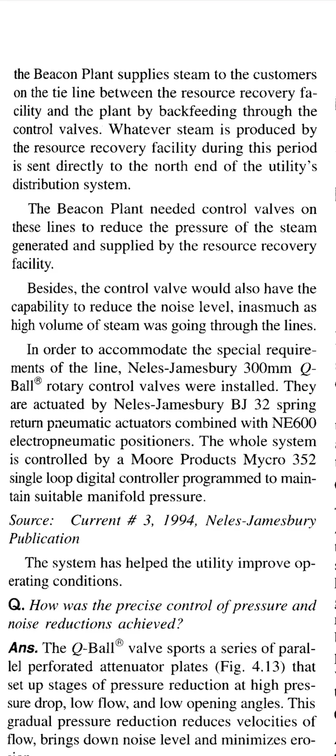The system has helped the utility improve operating conditions.

Question: how was the precise control of pressure and noise reduction achieved? Answer: the Q-ball valve sports a series parallel perforated attenuator plates that set up stages of pressure reduction at high pressure drop, low flow, and low opening angles.

This gradual pressure reduction reduces velocity of flow, brings down noise level, and minimizes erosion. Note: when high flow rate, large opening angle, and minimal pressure reduction are required, the plates align themselves with the flow, providing higher capacity than a traditional globe valve.

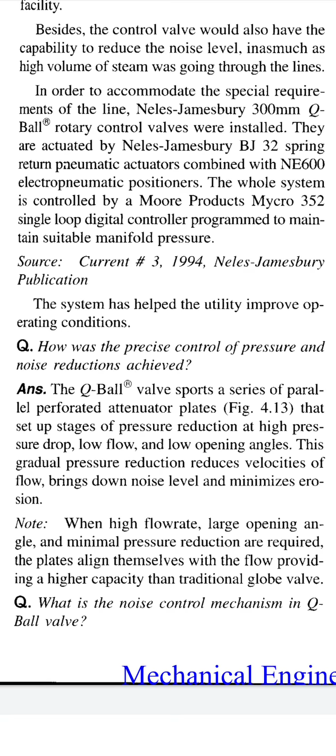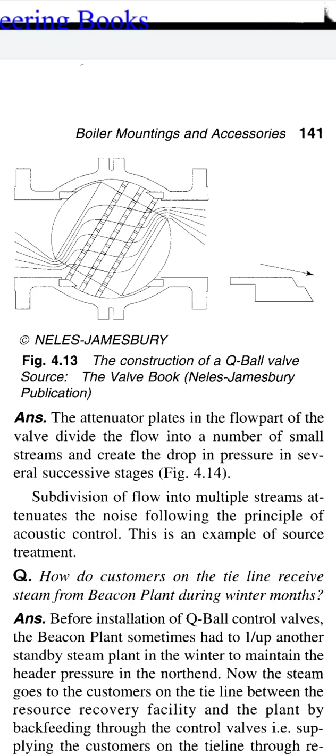We can see in the pictures the construction of a Q-ball valve. Source: the Valve Book, Neles Jamesbury publication.

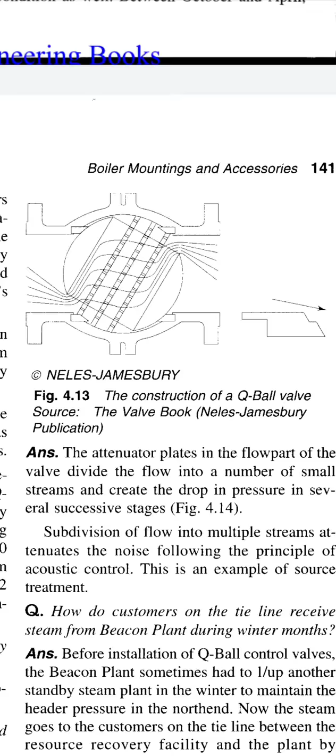So this Q-ball valve is reducing the noise by attenuator plates. Next question: what is the noise control mechanism in the Q-ball valve?

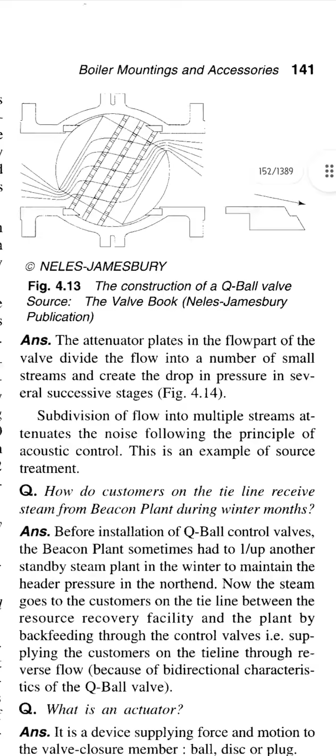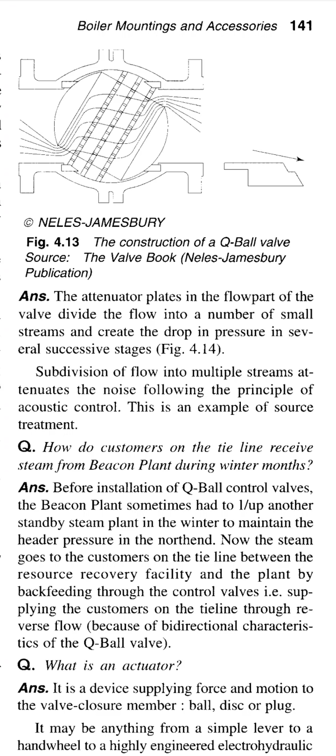Answer: the attenuator plates in the flow part of the valve divide the flow into a number of small streams and create the drop in pressure in several successive stages. Subdivision of flow into multiple streams attenuates the noise, following the principle of acoustic control. This is an example of source treatment.

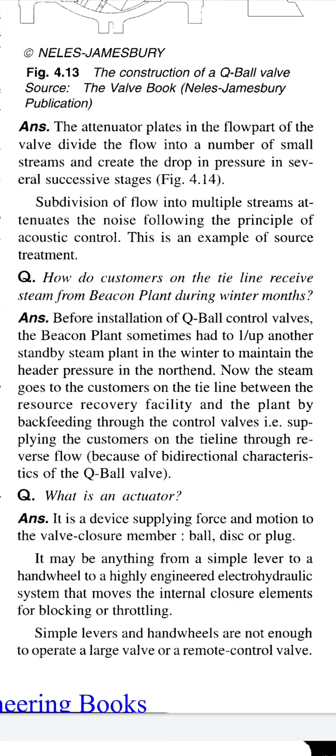Question: how do customers on the tie line receive steam from the Beacon Plant during winter months? Answer: before installation of Q-ball control valves, the Beacon Plant sometimes had to run another standby steam plant in the winter to maintain header pressure in the north end.

Now the steam goes to the customers on the tie line between the resource recovery facility and the plant by backfeeding through the control valves, meaning supplying the customers on the tie line through reverse flow because of the bidirectional characteristics of the Q-ball valve.

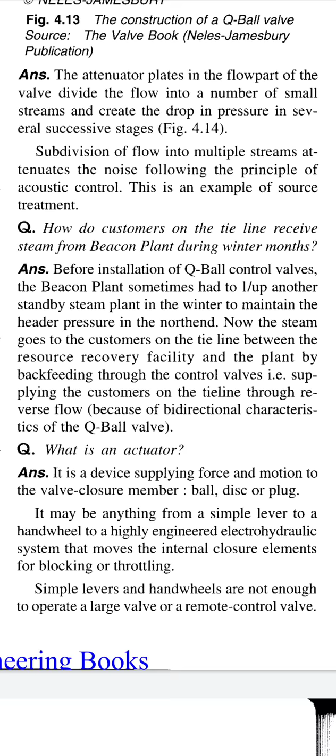What is an actuator? It is a device applying force and motion to the valve closure member, ball, disc, or plug.

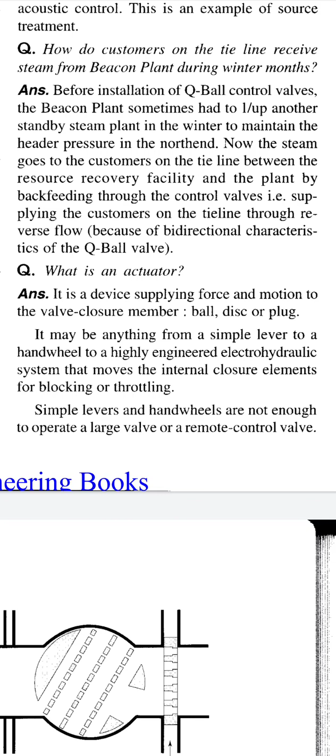It may be anything from a simple lever to a hand wheel to a highly engineered electro-hydraulic system that moves the internal closure elements for blocking or throttling. Simple levers and hand wheels are not enough to operate a large valve or remote control valve.

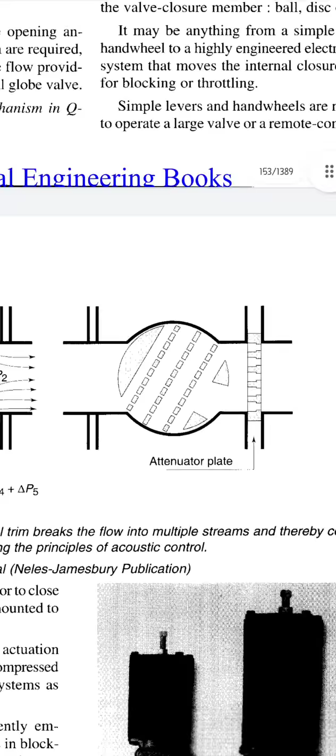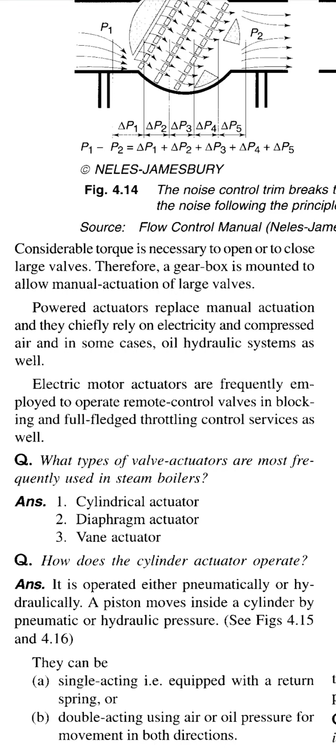Considerable torque is necessary to open or close large valves. Therefore, a gearbox is mounted to allow manual actuation of large valves. Powered actuators replace manual actuation, and they chiefly rely on electricity and compressed air, and in some cases oil hydraulic systems as well.

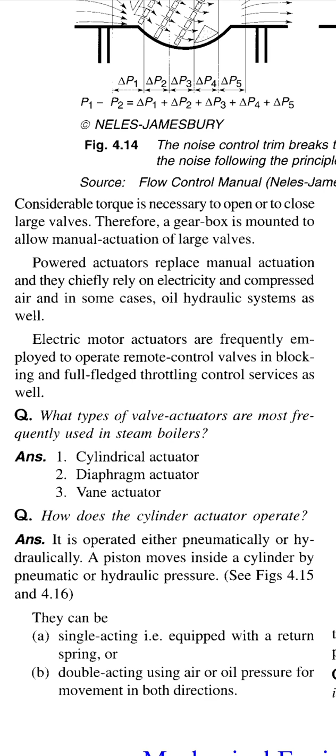Electric motor actuators are frequently employed to operate remote control valves in blocking and full-fledged throttling control services as well. So this is the diagram.

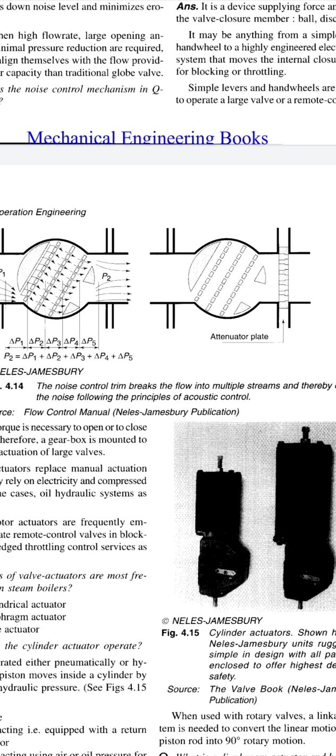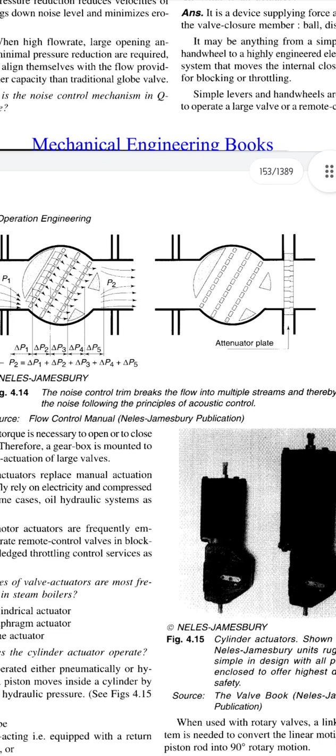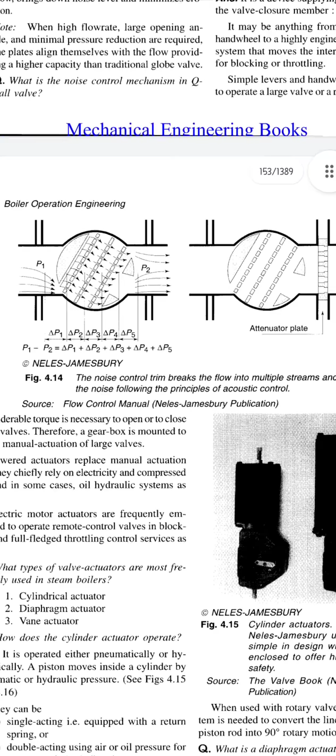We can see the noise control trim breaks the flow into multiple streams and thereby controls the noise, following the principle of acoustic control. We can see the attenuator plate on the right side of the diagram, and here we can see the pressure, and this is the diagram.

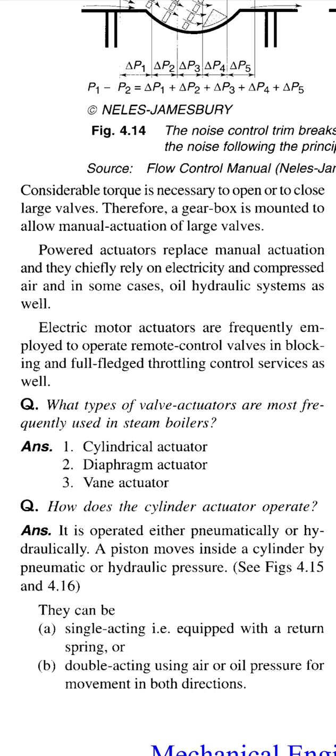Next question: what types of valve actuators are most frequently used in steam boilers? Cylindrical actuator, diaphragm actuator, vane actuator.

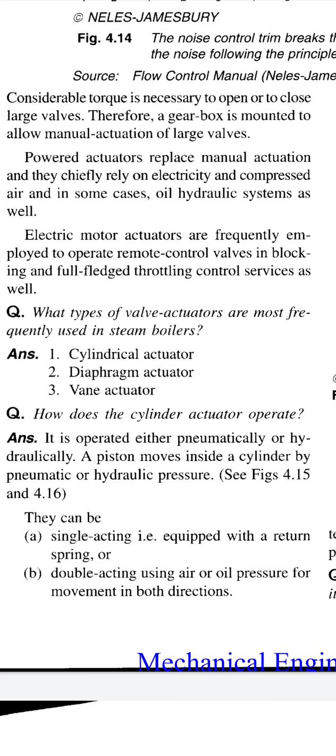How does the cylindrical actuator operate? It is operated either pneumatically or hydraulically. A piston moves inside a cylinder by pneumatic or hydraulic pressure. They can be single acting, meaning equipped with a return spring, or double acting, using air or oil pressure for movement in both directions.

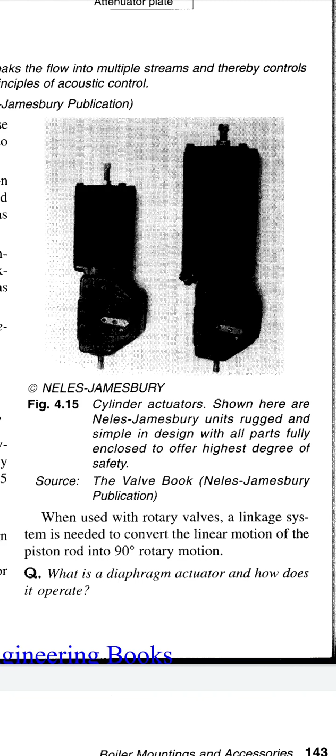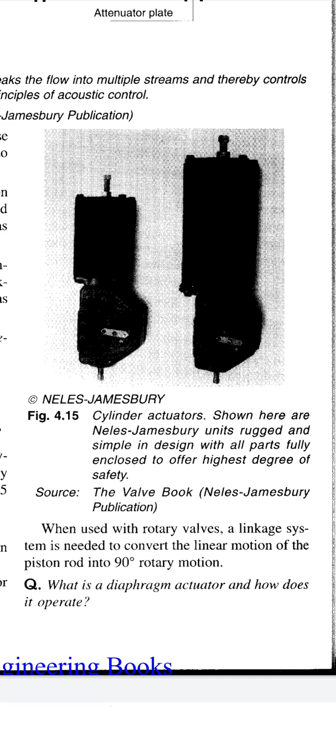When used with rotary valves, a linkage system is needed to convert the linear motion of the piston rod into 90-degree rotary motion. Next question: what is a diaphragm actuator and how does it operate?

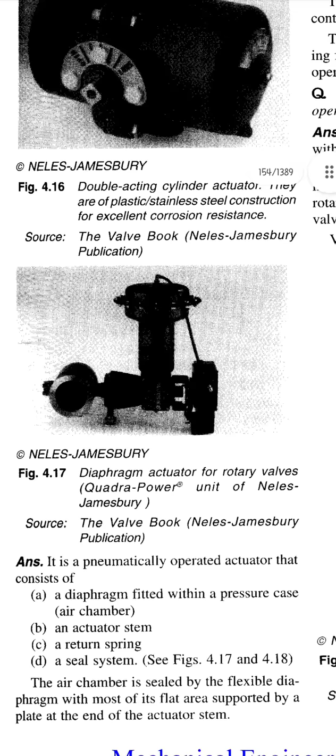It is a pneumatically operated actuator that consists of a diaphragm fitted within a pressure case, air chamber, an actuator stem, a return spring, and a seal system.

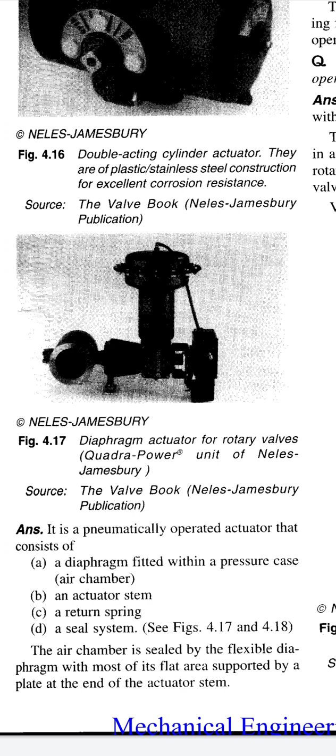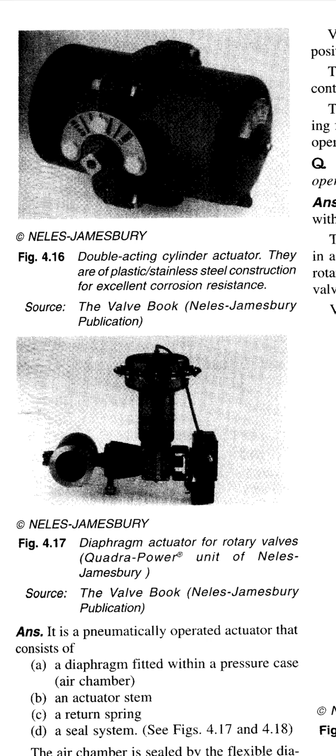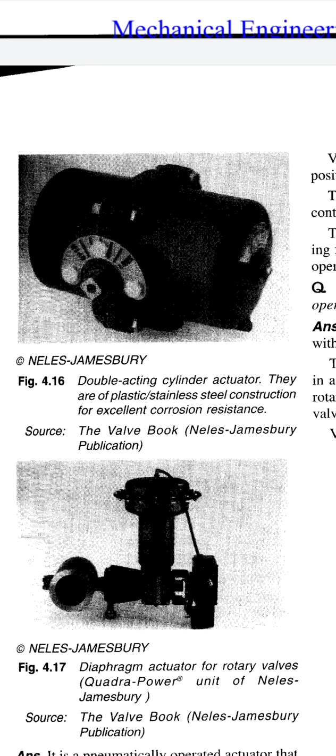We can see in the picture the diaphragm actuator for rotary valves, the Quadra-Power unit of Neles-Jamesbury, and figure 4.16 is a double acting cylinder actuator. They are of plastic or stainless steel construction for excellent corrosion resistance. This is the double acting cylinder actuator.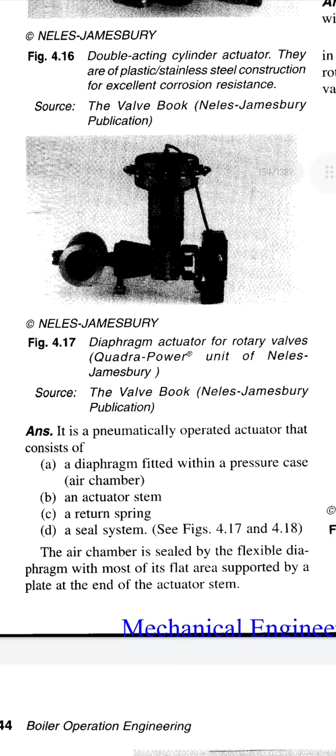Variable air pressure. Once again, going to the question: what is a diaphragm actuator and how does it operate? Continuing: variable air pressure flexes the diaphragm and positions the stem with the aid of the return spring. The system adapts well to small to medium control valves.

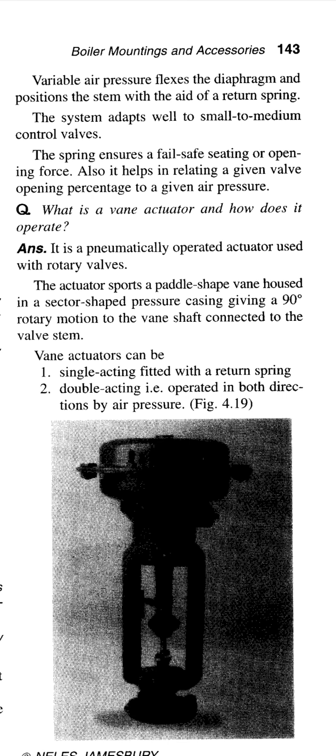The spring ensures a fail-safe seating or opening force. It also helps in relating a given valve opening percentage to a given air pressure.

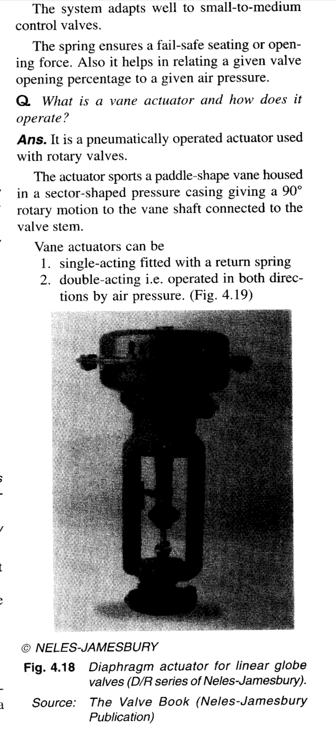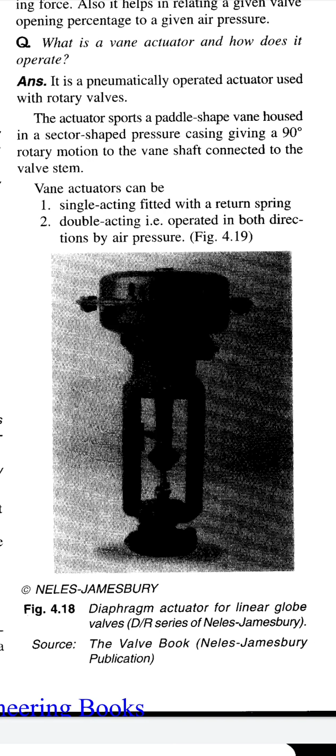Next question: what is a vane actuator and how does it operate? It is a pneumatically operated actuator used with rotary valves. The actuator sports a paddle-shaped vane housed in a sector-shaped pressure casing, giving a 90-degree rotary motion to the vane shaft connected to the valve stem.

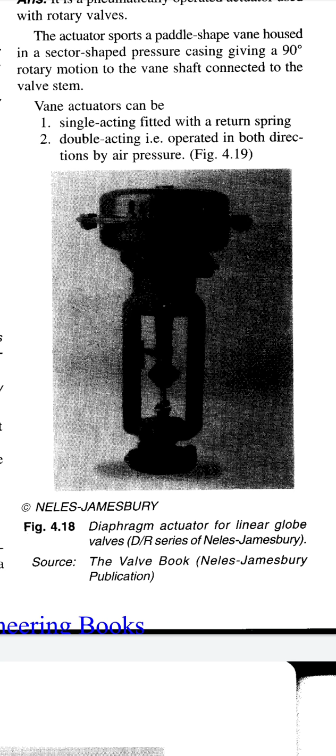Vane actuators can be single acting, fitted with a return spring, or double acting, meaning operated in both directions by air pressure.

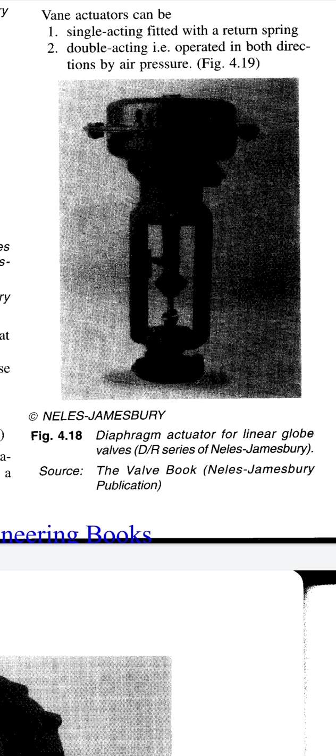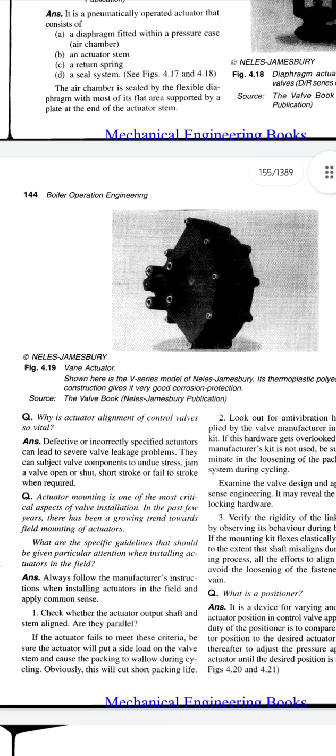In this next diagram we can see the diaphragm actuator for linear globe valves. The next diagram shows the vane actuator, shown here in the V series model of Neles-Jamesbury. Its thermoplastic polyester construction gives it very good corrosion protection.